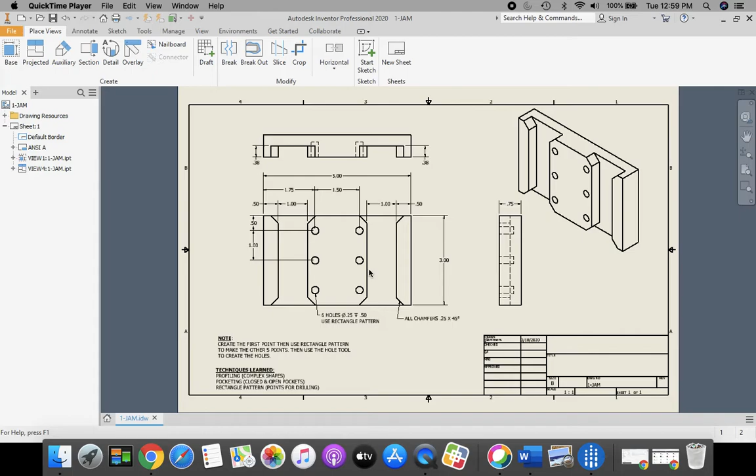Welcome back. Today we're going to take a look at creating our standard.idw, our drawing for our part 1 jam. We're going to place all 4 views, a front view, a top view, a right side view, and a pictorial isometric view on our drawing. And this one we're going to fully dimension as well, so you might want to have the PDF open to match some of the dimensions. Once we start dimensioning I'll go a little faster, then slow down when we get to the chamfers and hole identification.

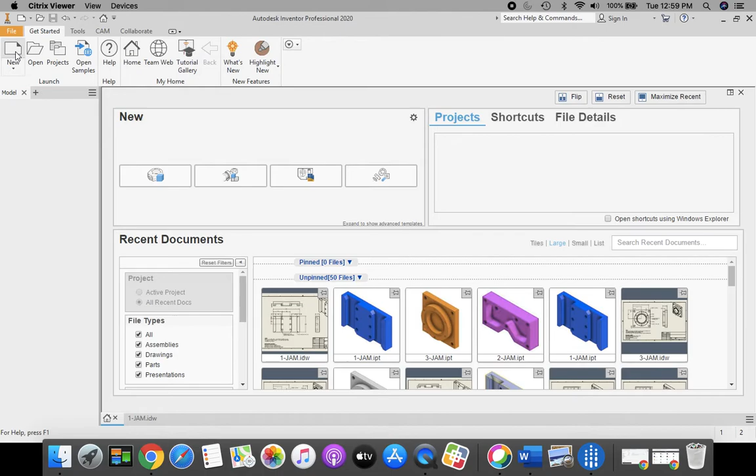To begin, we're going to go to File. We'll start in our ribbon bar, go up to New, select this icon right here, standard.idw, and click Create.

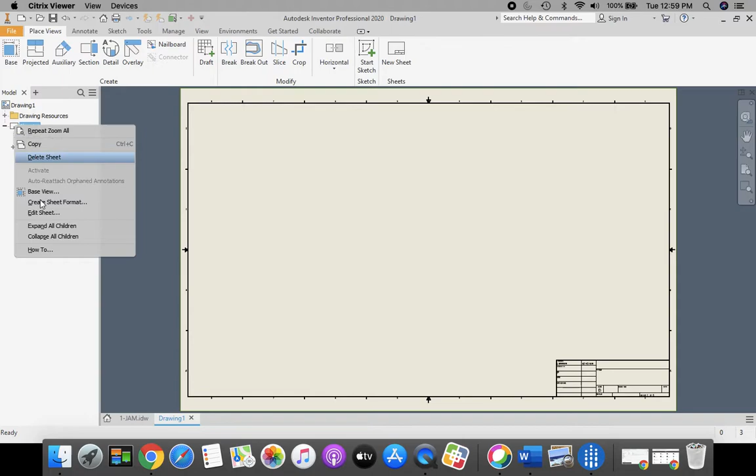Now this part opens up starting as a D size sheet, which is a little big for what we're doing. So we're going to come over to our model browser where you see Sheet 1, right click on that, and select Edit Sheet. You may have to change your tool from the pointer tool to the mouse tool if you're on your iPad. Once the Edit Sheet menu opens, we're going to change the size from D to a B size sheet, and then click OK.

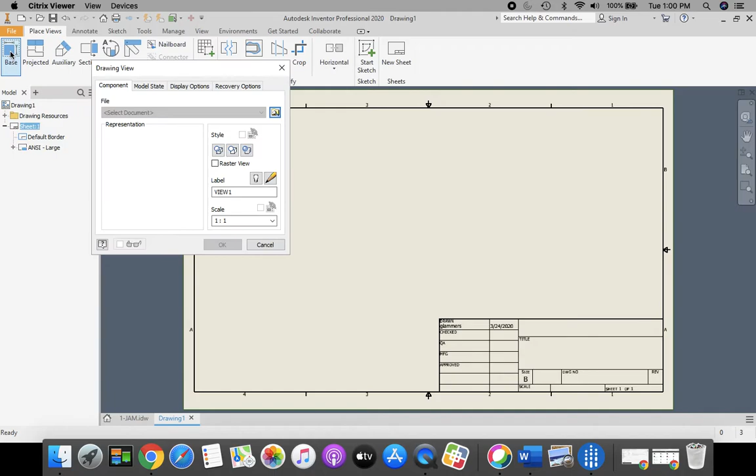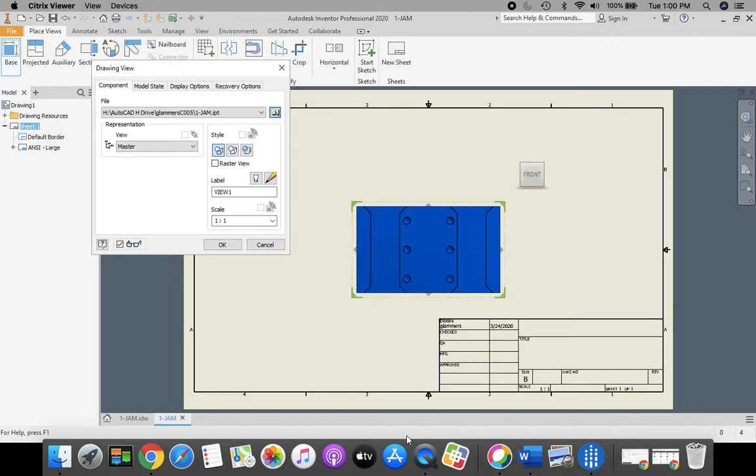Next, we're going to place our part in there. We go to our base view and select the folder icon with a magnifying glass to browse and open an existing file. It should automatically link to your H drive, first initial last name 000, and we'll select our 1 jam part and click Open. Click OK.

Now we'll take our cursor and bring it up to our part, and when we get the red dotted line around our part, we click and push this part over to the left hand side, positioning it right there, still above the title block.

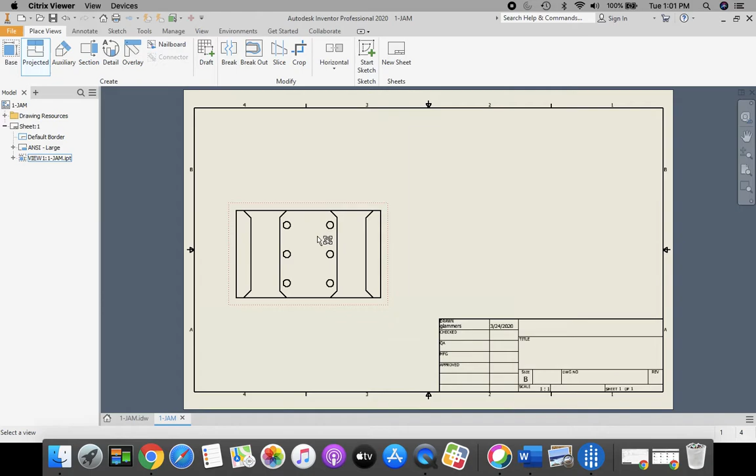Next, we come up to Projected in our ribbon bar, next to Base. Mine automatically locks on with this part. However if yours does not, when you click Projected, bring your cursor to the middle of your part, click, and it should automatically identify that part and give us the projected views.

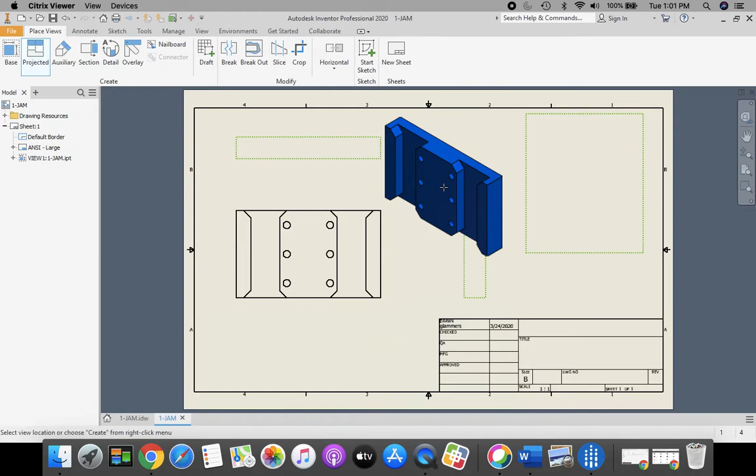We're going to click and place a top view, click and place a right side view, and up in the upper right hand corner, click and place that pictorial isometric view. When you're finished, once again you might have to drop your pointer tool and get your mouse tool if you're on your iPad. We're going to right click and select Create.

Now we're going to change from the Place Views tab above our ribbon bar to the Annotate tab, and here we're going to match the dimensions that are on our PDF drawing. To start off, I'm going to dimension from the top view.

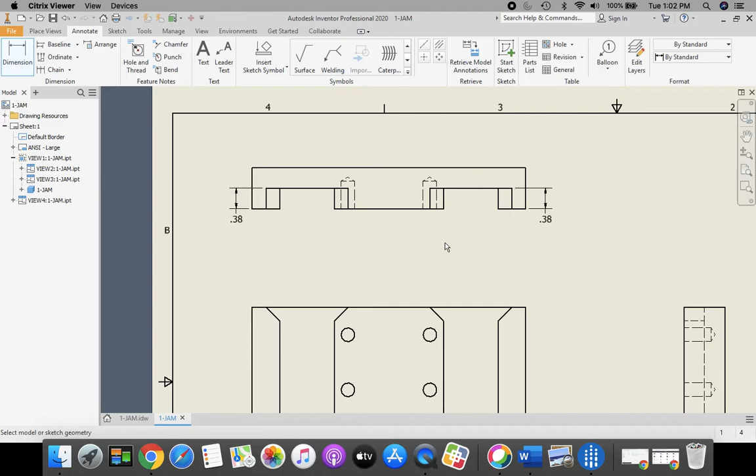From the top view of our part, in order to show our depth of those pockets that we made. Then on our front view, we're going to dimension and match the dimensions on the PDF that give us all our critical dimensions to draw this part. This is locating the center of the holes. You can pause at any time to get caught up. I'm just matching the dimensions that are on the PDF drawing.

See how that 0.5 goes over the top to the wrong side? If that happens to you, press Escape, then Dimension again. That's because we selected the inside first, so it's always going to put the numbers on the side that you click first when you bring that dimension up. Did you see how that flipped around now?

We also need the overall height. This here is going to give us the overall thickness right here. And we need the overall length, from the right hand side of our part to the left hand side of our part. There we go, not too bad.

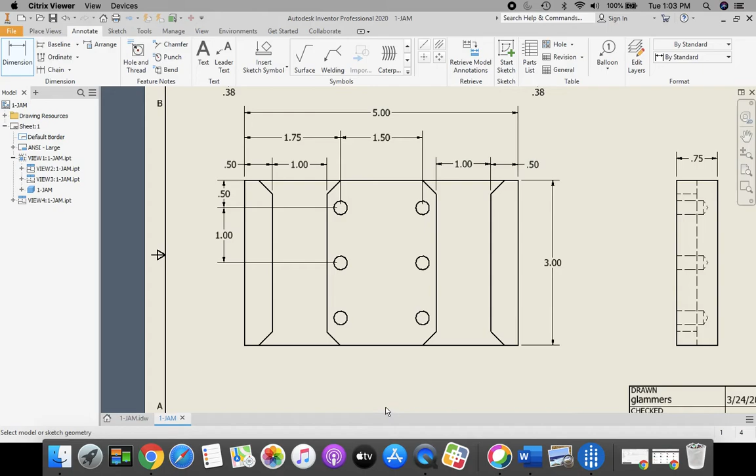Now to come in here and establish our chamfer and our hole specification. Our holes are kind of easy. We can come up here and click our hole tool and thread, select one of the holes, and bring that leader down.

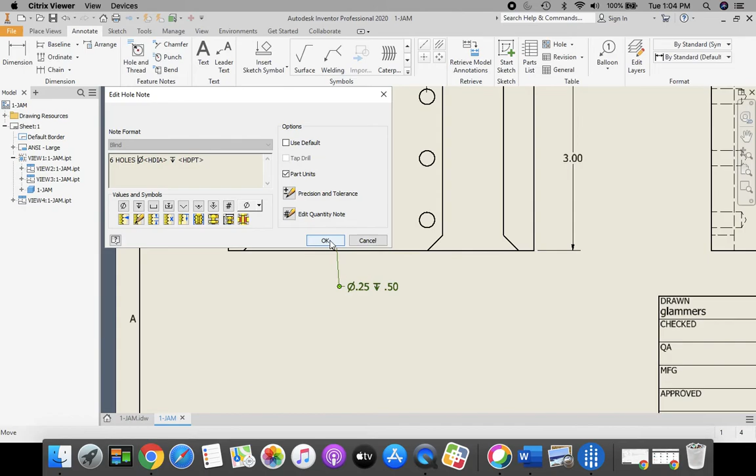Press the escape key. It's fine if you leave it this way, but the way I got it to read 6 holes is I clicked on that, placed my cursor on the edit text box, and just typed '6 holes', then selected OK. That puts that little definition in there.

I also, for my chamfer, go next to holes and threads and select my chamfer tool. I click the chamfer edge, click the bottom of my part, and bring this dimension out.

Press the escape key. In order to get this text to flip on the other side, you can just take your text and flip it around like that. Press the escape key when you're done.

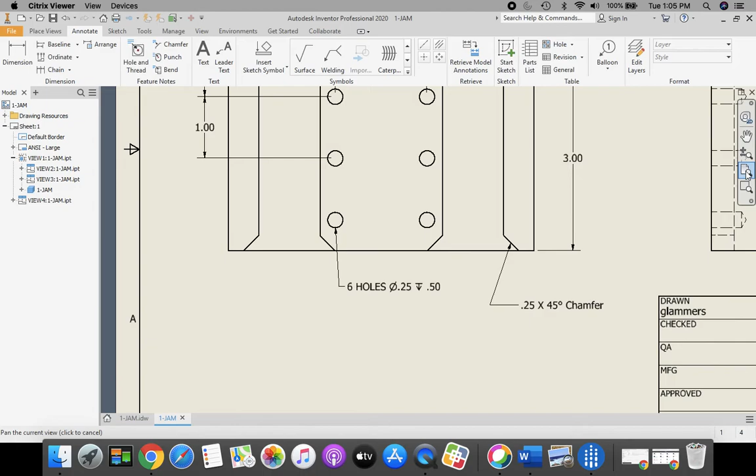I'm zooming out. I click the magnifying glass piece of paper on the right hand side in our model browser, over here, our view. And I'm done. I'm ready to save, so let's go up to the top.

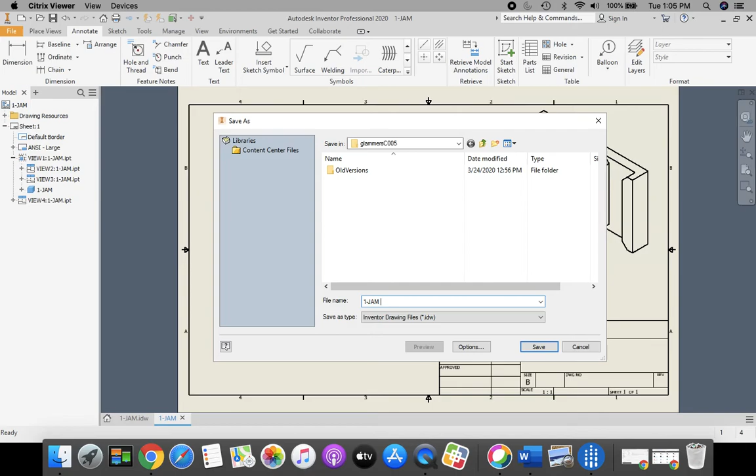We're going to click orange File from the top left hand side of our screen, go down to Save As. We want this to go into our H drive, first initial last name C005, 1 Jam. I'm going to type my last name after this. You're going to type your last name there and click Save.

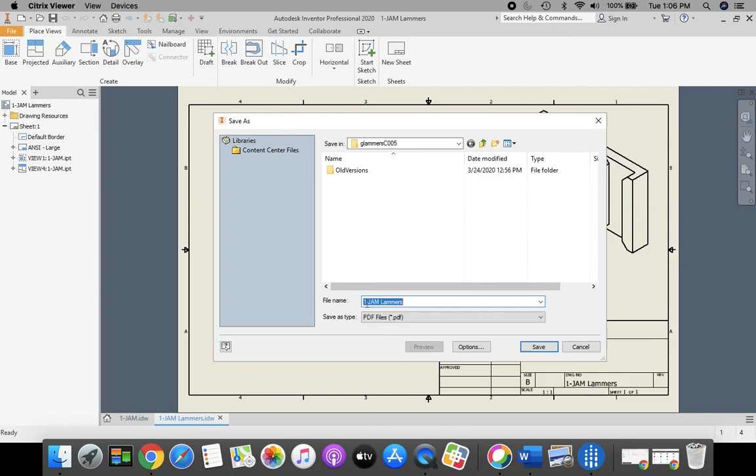The next thing we need to do is get this into a format where we can save it as a PDF and put it into Google Classroom. To do that, we're going to go up to the orange File in the top left corner, go down to Export, and select PDF. Once again we're going right to our H drive, first initial last name C005. Our file name is the same, part and last name. And we're going to click Save.